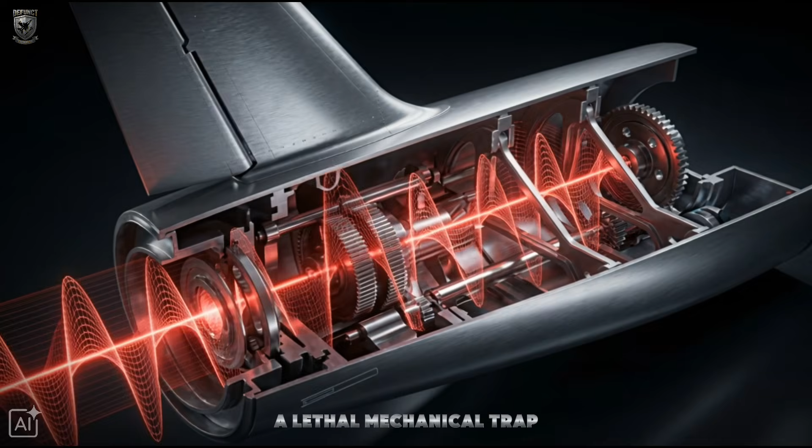The truth, buried deep within declassified engineering failure analyses, is far more terrifying. The Black Hawk was not just defeated by an enemy warhead. It was torn apart from the inside out by an invisible assassin, a lethal mechanical trap known as harmonic resonance, hiding in plain sight at exactly 1,190 revolutions per minute.

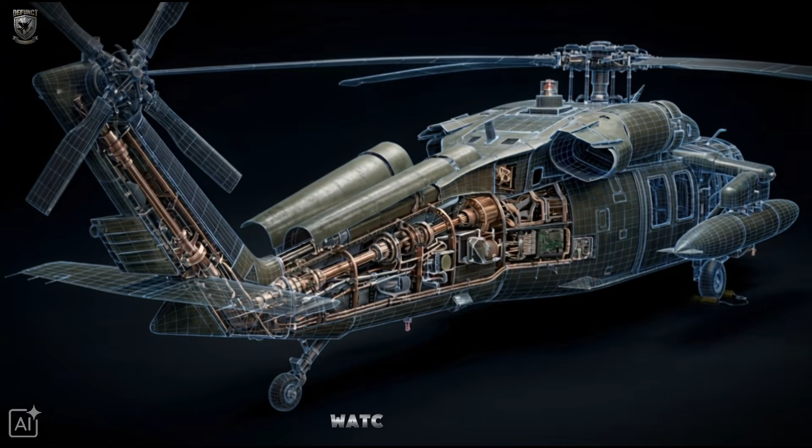Let us strip away the mythology and look at the raw physics. I am going to peel back the 2024 T3 aluminum alloy skin of this tail boom to expose the central nervous system of this $60 million machine. Watch closely as we render the outer shell completely transparent.

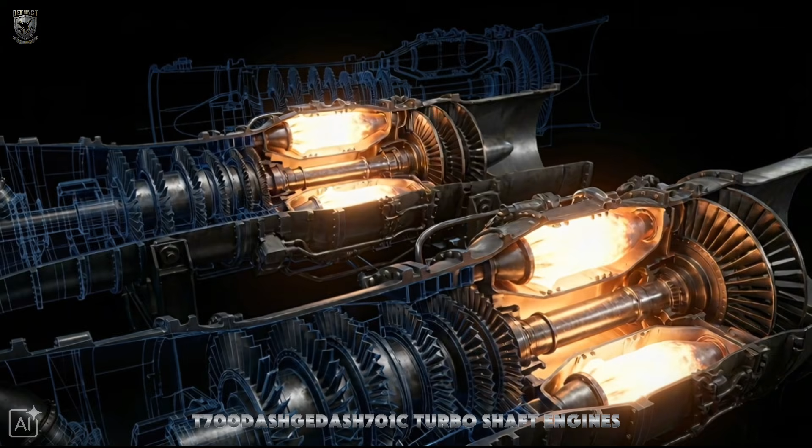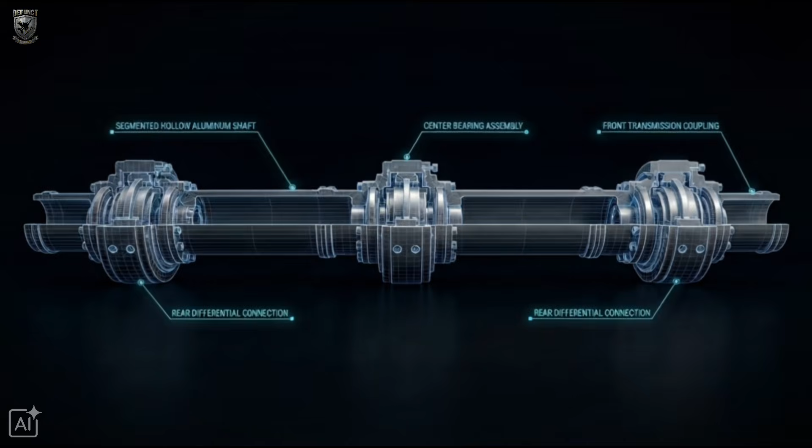What you are looking at is the drivetrain. Up front, twin General Electric T700-GE-701C turboshaft engines generate a combined output of 3,240 shaft horsepower. That immense kinetic energy has to go somewhere.

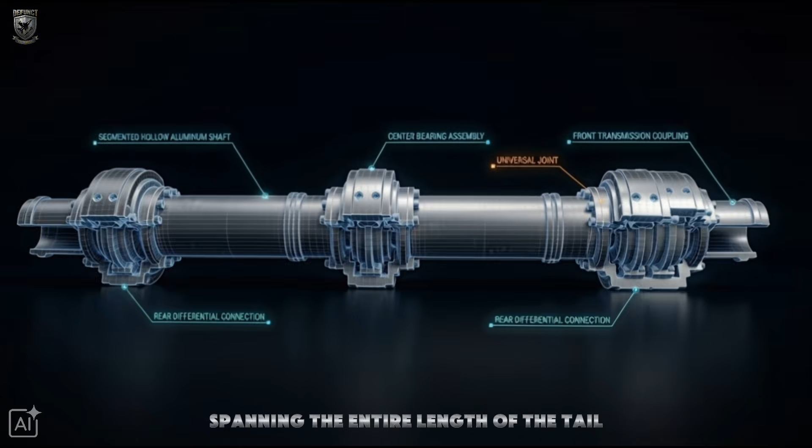A massive portion of it is sent down this spine. We are looking at a segmented driveshaft spanning the entire length of the tail, composed of 6 individual hollow aluminum sections. These sections are coupled together by viscous damper bearings, ultimately feeding rotational force into the tail rotor gearbox.

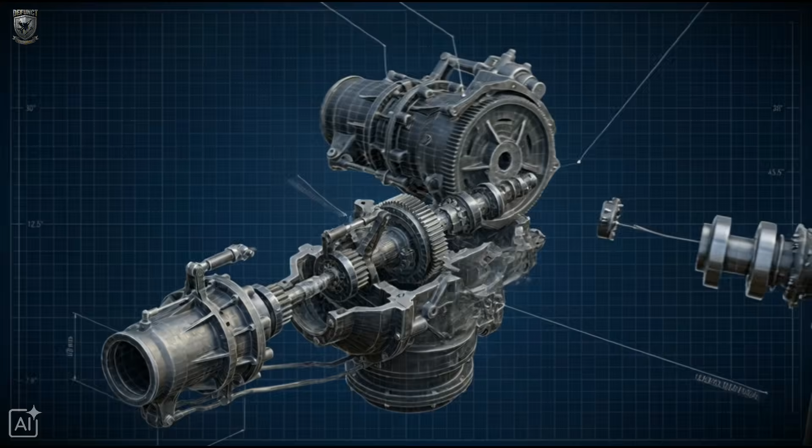Now look at the tail rotor itself. The engineers at Sikorsky built this component to be an absolute fortress. The rotor blades are forged from a Kevlar composite matrix, featuring a titanium leading edge. They over-engineered it specifically to withstand a direct hit from a 23mm anti-aircraft shell. It is a masterpiece of ballistic survivability.

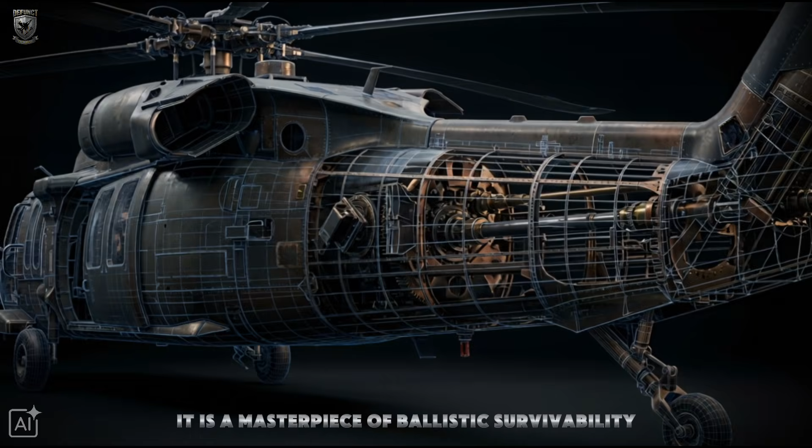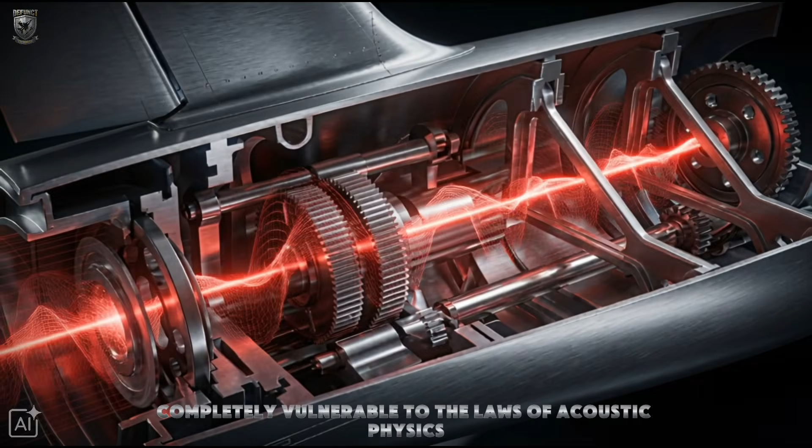But here's the fatal irony. In their pursuit of armor and material strength, they created a system completely vulnerable to the laws of acoustic physics. To understand this flaw, we have to pause the rotor and analyze the baseline frequencies of the airframe.

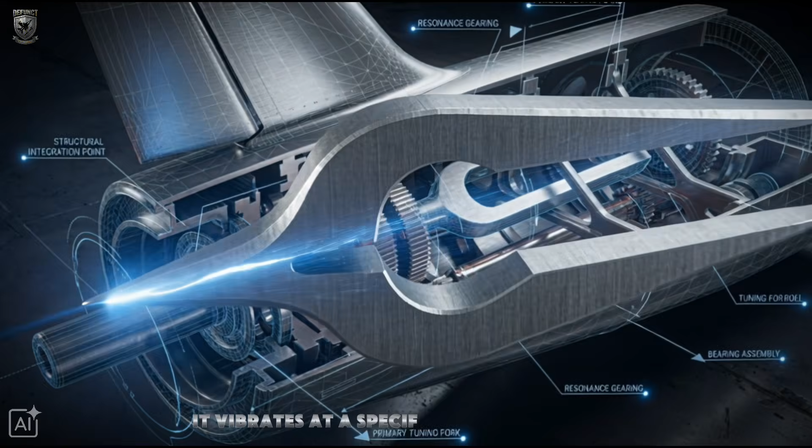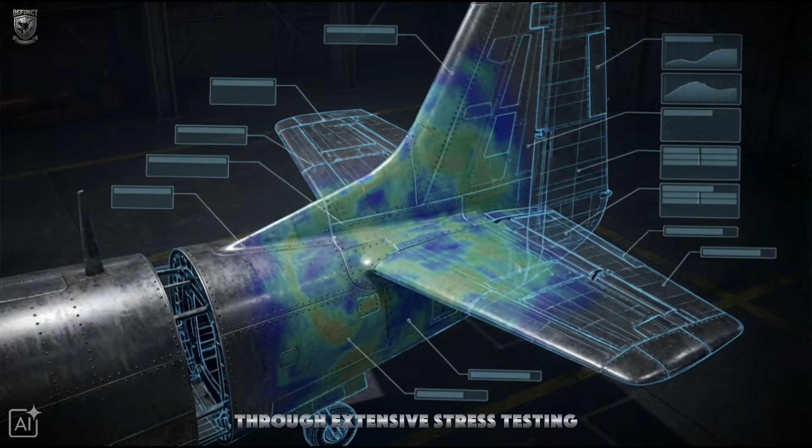Everything in the physical universe has a natural frequency. If you strike a tuning fork, it vibrates at a specific, unchanging rate. The UH-60's tail boom is a massive tuning fork made of aluminum and steel. Through extensive stress testing, engineers knew the natural resonant frequency of this tail section.

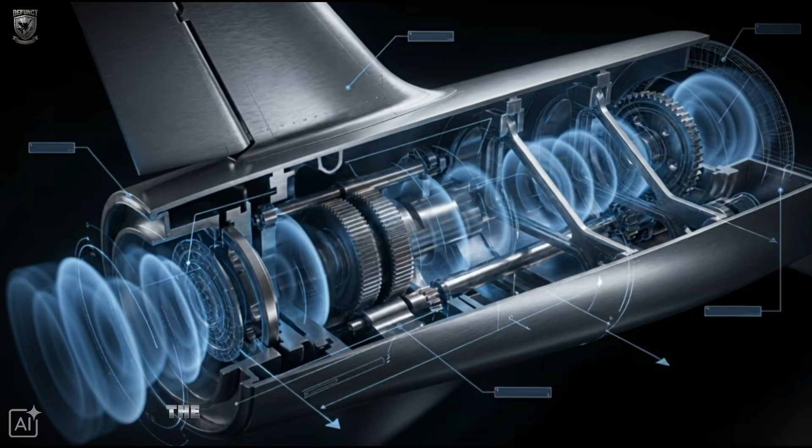Under normal combat conditions, the drivetrain spins at a nominal rate, pushing the tail rotor to hundreds of revolutions per minute, well outside the danger zone. The acoustic waves generated by the spinning shaft pass harmlessly through the metal frame.

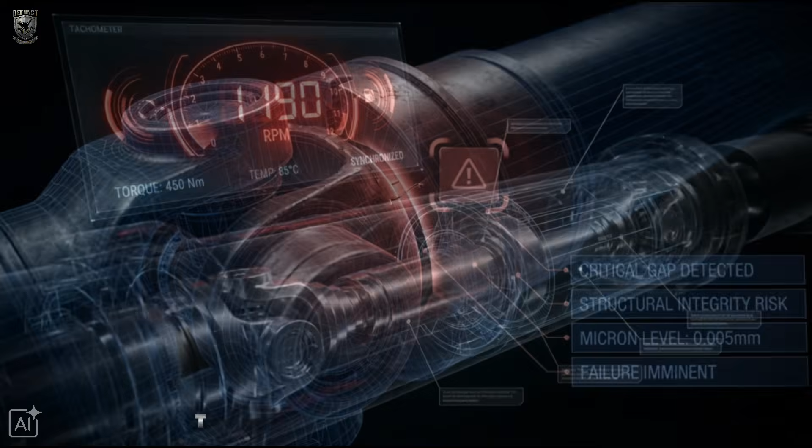But the blueprints reveal a microscopic gap in this perfection. There is a very specific rotational speed, exactly 1,190 revolutions per minute, where the spinning frequency of the driveshaft perfectly matches the natural resonant frequency of the tail boom. If the driveshaft RPM drops and holds at that exact number, the physical vibrations do not cancel out. They synchronize. They stack on top of each other.

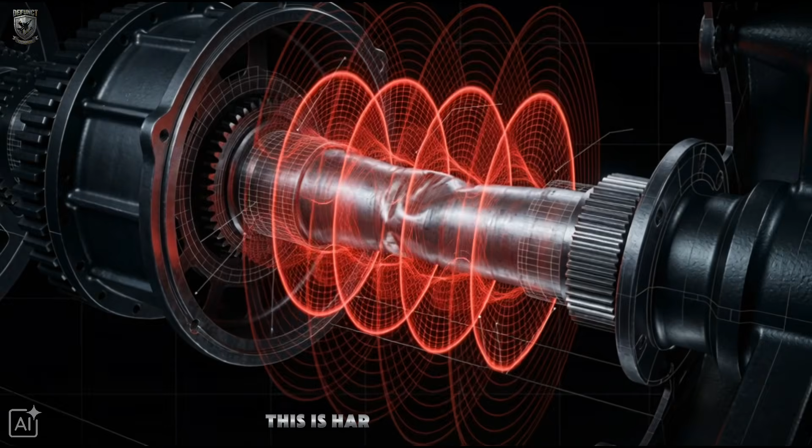This is harmonic resonance. It is the exact same physical principle that allows a trained soprano to shatter a crystal glass with her voice. Except, in this scenario, the glass is a military helicopter carrying highly trained operatives, and the voice is a 3,000 horsepower mechanical scream.

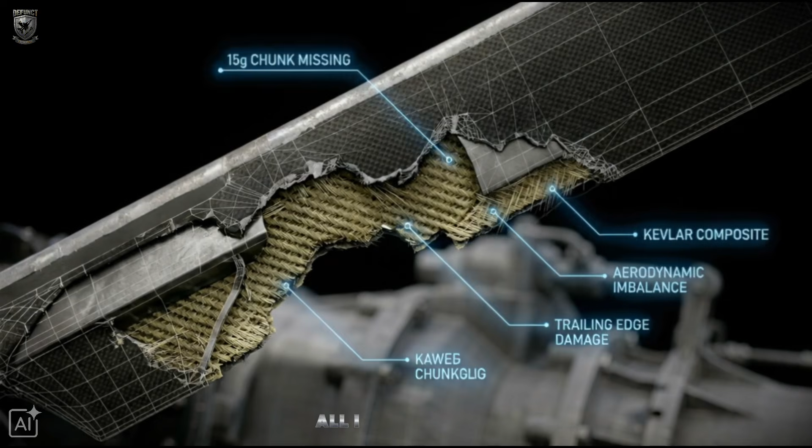The system is fundamentally designed to tear itself apart if it hits that acoustic sweet spot. And in the thin, searing 40°C air of Mogadishu, all it took was 15 grams of missing mass to trigger the countdown. Let us zoom in further on those viscous damper bearings connecting the 6 driveshaft segments.

These are not simple ball bearings. They are filled with a highly specialized silicone fluid, designed to absorb the microscopic tremors generated by the twin turbines.

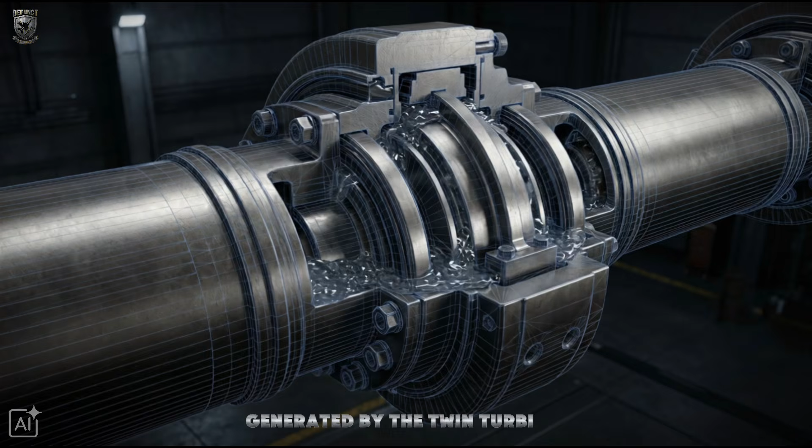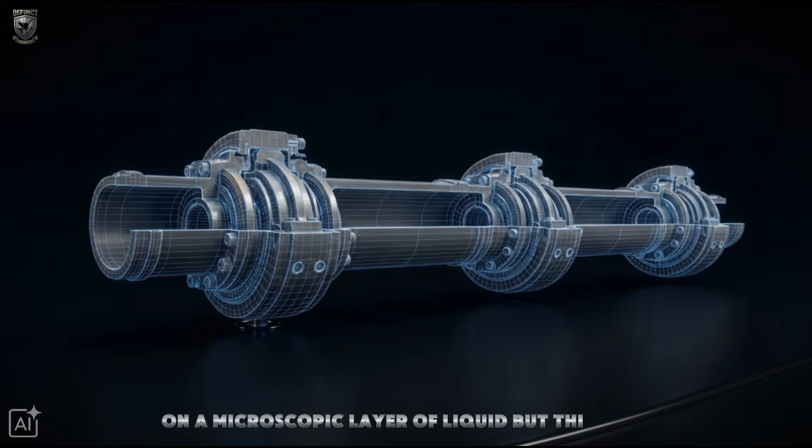We are taking a cross-section of the bearing housing. Notice the tight tolerances, less than 0.003 of an inch of clearance between the spinning shaft and the stationary race. When operating at peak efficiency, the fluid creates a hydrodynamic wedge, literally floating the driveshaft on a microscopic layer of liquid. But this fluid is highly sensitive to thermal overload.

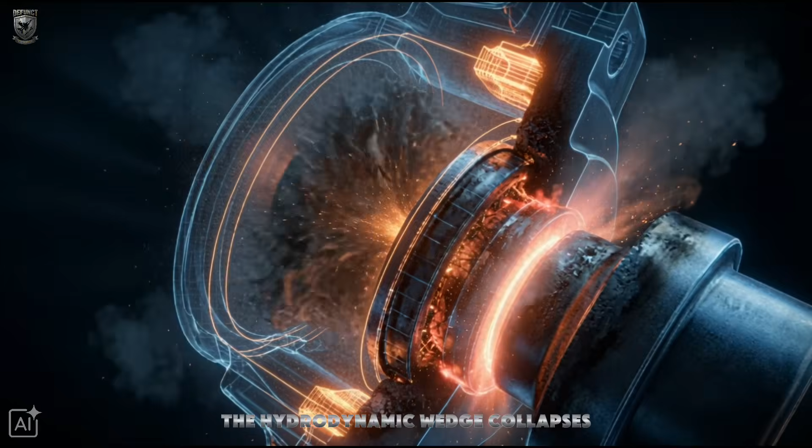If the shaft begins to wobble, the friction spikes. The internal temperature of the bearing housing can skyrocket from an ambient 90 degrees to over 400 degrees Fahrenheit in a matter of seconds. The silicone fluid breaks down, losing its viscosity. The hydrodynamic wedge collapses. Metal begins to grind directly against metal. Now, look back at the tail rotor blades.

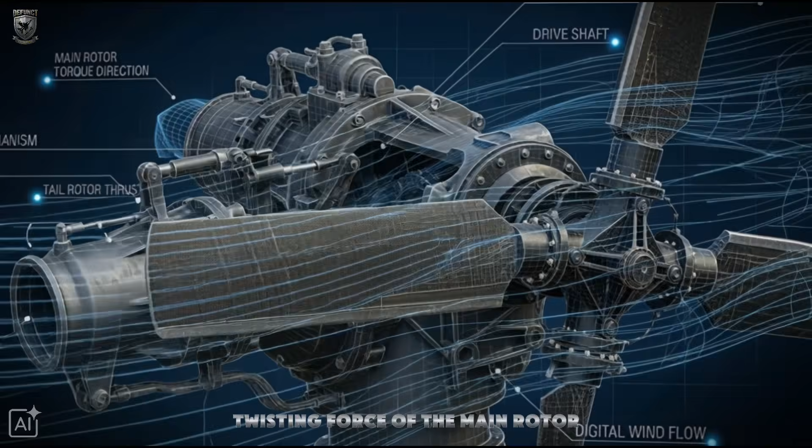They span 9 feet in diameter, acting as a massive gyroscope at the rear of the aircraft. They are pitched at precisely calculated angles to generate anti-torque, counteracting the immense twisting force of the main rotor. Every single ounce of weight on those blades is balanced dynamically. If you add or remove even a fraction of an ounce, you introduce a mass imbalance.

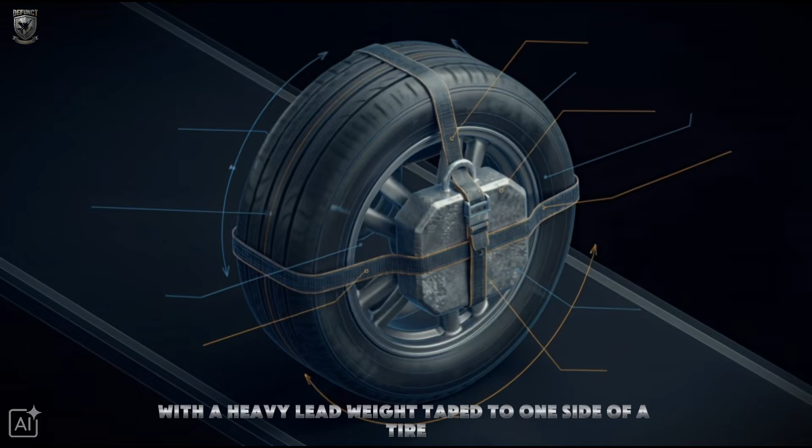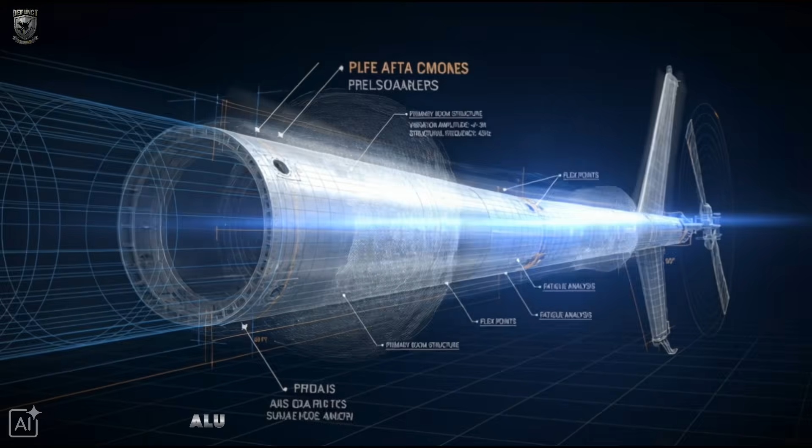Imagine taking your car down the highway with a heavy lead weight taped to one side of a tire. The steering wheel shakes violently. Now multiply that rotational speed by 10, and imagine that tire is attached to a hollow aluminum tube suspended 50 feet in the air. That is the kinetic reality of a compromised tail rotor.

The Sikorsky design team knew about the dangers of vibration. They installed elaborate elastomeric bearings in the main rotor hub. These are essentially high-tech rubber shock absorbers, incredibly efficient at soaking up the brutal, low-frequency thumping of the massive main blades cutting through the air.

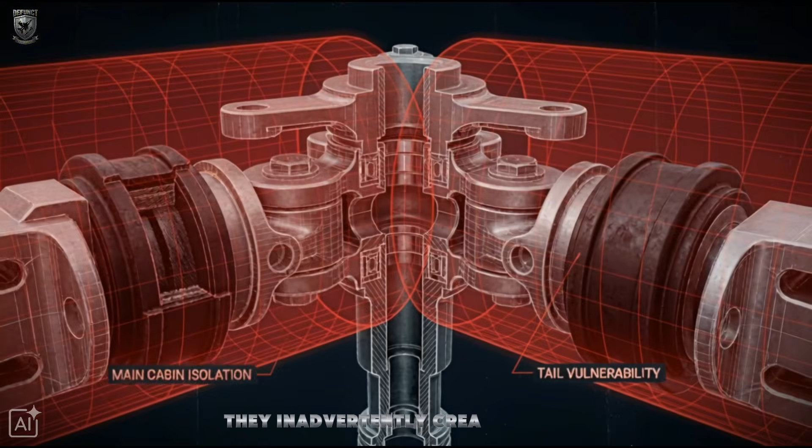However, by isolating the main cabin so effectively, they inadvertently created a trap. The kinetic energy, the raw, unfiltered vibration from a damaged tail rotor, has nowhere to go. It cannot travel forward into the heavily damped main cabin. So it reflects backwards. It bounces off the elastomeric barrier and is forced straight back down the tail boom. The tail section becomes a rigid lever, amplifying the destructive force.

Every single rivet holding the aluminum skin together is subjected to extreme shear stress. The 2024 T3 aluminum alloy is fantastic for its strength-to-weight ratio, but it is notoriously susceptible to high cycle fatigue. When you subject it to a constant, high-frequency, high-amplitude vibration, microscopic fractures begin to form at the crystalline level of the metal.

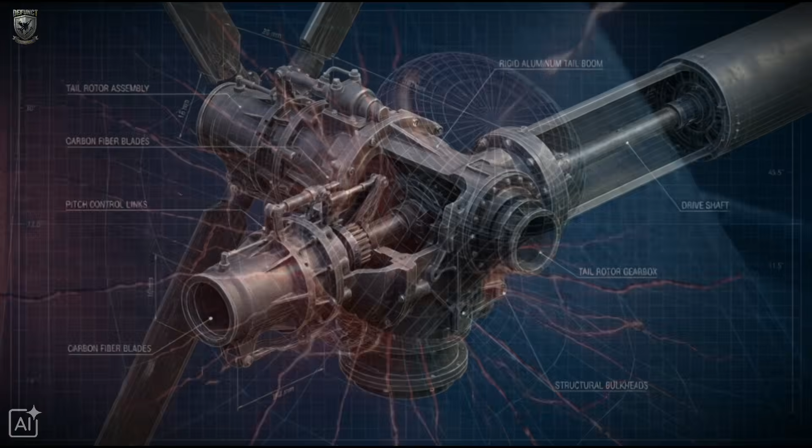We are looking at a simulation of these microfractures spreading across a rivet hole, expanding at a rate of millimeters per second. This is the anatomical layout of the hidden trap. A Kevlar-reinforced tail rotor, completely capable of surviving a localized explosion, bolted to a driveshaft system that will obliterate itself if forced into the 1,190 revolutions per minute death zone.

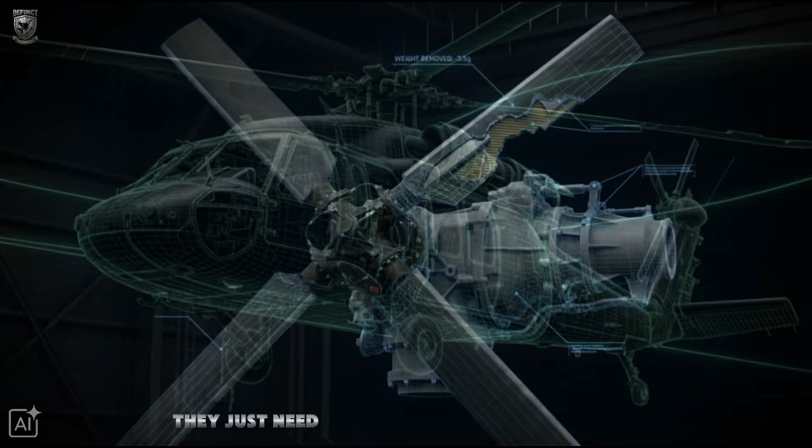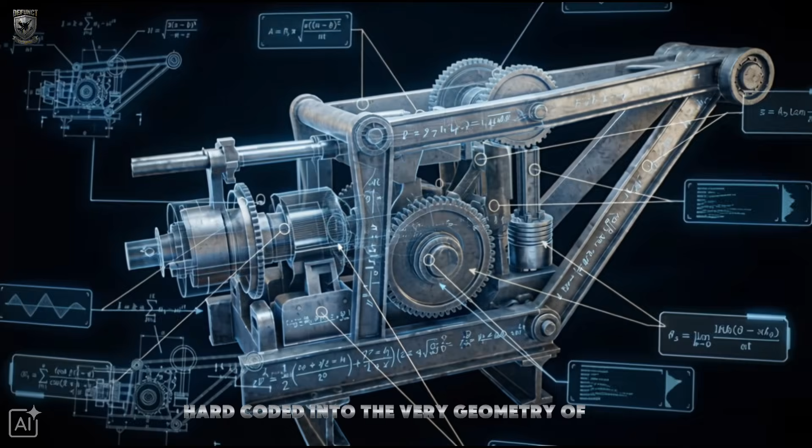All the enemy needed to do was scratch the surface. They did not need to blow the helicopter out of the sky. They just needed to alter its physical weight by a few grams, force the engines to bleed off speed, and let the unforgiving laws of acoustic physics finish the job. This is not just a vulnerability. It is a mathematical certainty, hard-coded into the very geometry of the airframe.

Let us place this meticulously designed machine into the unforgiving crucible of urban combat. The airspace above Mogadishu is saturated with hostile fire. The trajectory of a Soviet-manufactured RPG-7 warhead intersects with the rotational arc of the Black Hawk's tail section.

However, the initial kinetic impact does not trigger a catastrophic high-explosive detonation. The ballistic tolerance of the Kevlar composite matrix actually performs exactly as Sikorsky engineers intended, absorbing the blunt force trauma and preventing the blade from instantly shattering.

But the kinetic energy transfer shears off a jagged, seemingly insignificant chunk of the blade's trailing edge. We are talking about a microscopic loss of mass. Precisely 15 grams of composite material vanishing from an aerodynamic surface that is currently spinning at 1,400 revolutions per minute.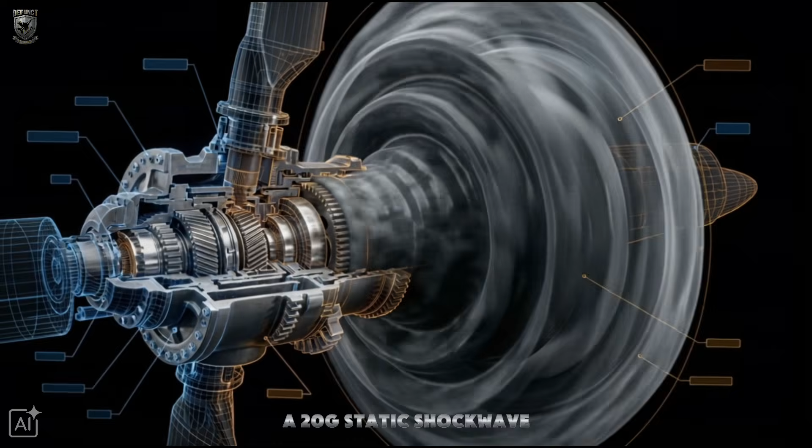Instantly, the flawless gyroscopic balance of the tail assembly is violently compromised. The tail rotor ceases to be a precision, stabilizing instrument and instantly transforms into a massive, unbalanced wrecking ball attached to the rear of the aircraft. A 20G static shockwave, a burst of pure kinetic displacement, rips through the cast magnesium housing of the tail rotor gearbox. Inside the cockpit, the pilots are fighting a sudden, violent yaw.

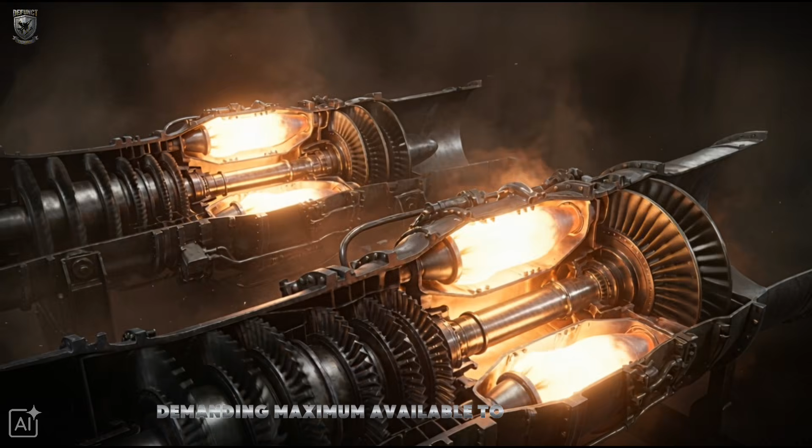To maintain altitude and directional control, they instinctively and aggressively manipulate the collective pitch lever, demanding maximum available torque from the twin T700 turboshaft engines. This sudden, extreme power demand causes a momentary, yet physically fatal, bleed-off in overall rotor speed. Watch the digital tachometer telemetry stream drop in real time, from the nominal 1,350 revolutions per minute down to 1,280.

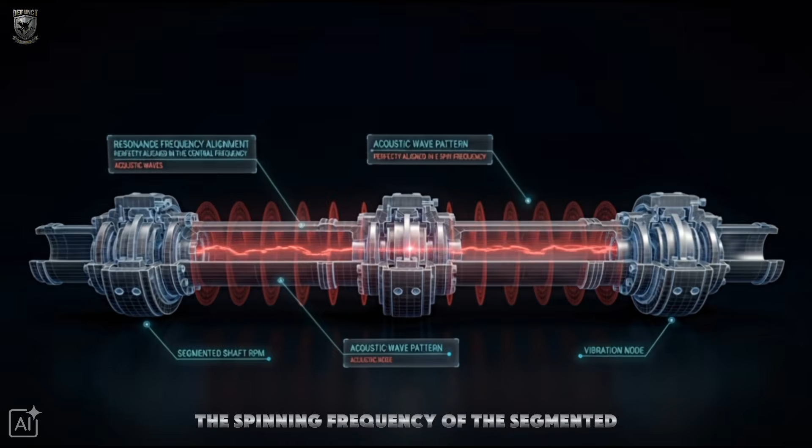And then it hits the acoustic death zone, 1,190 revolutions per minute. This is the exact millisecond the spinning frequency of the segmented aluminum driveshaft mathematically synchronizes with the natural resonant frequency of the entire aluminum and steel tail boom structure.

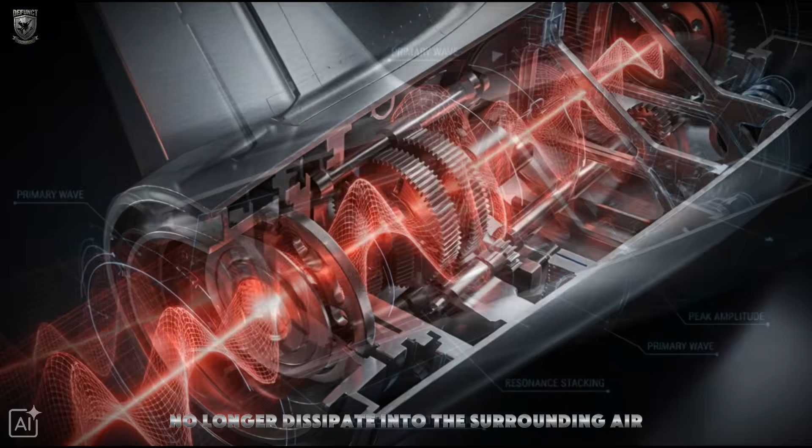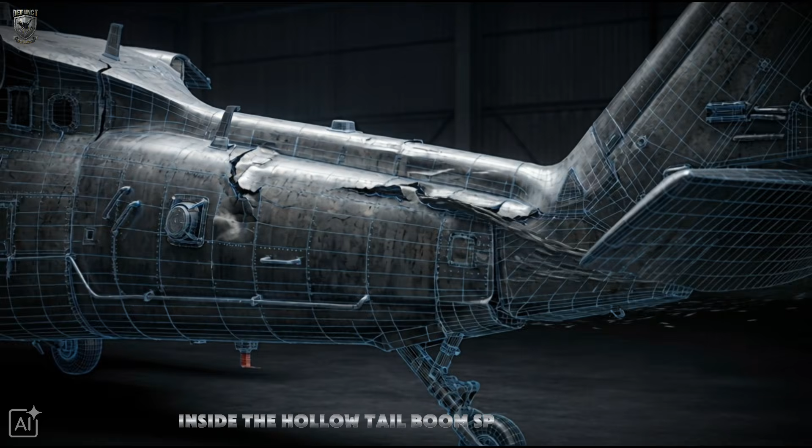The physical vibrations traveling down the spine of the aircraft no longer dissipate into the surrounding air. They synchronize, they stack, they multiply exponentially through the principle of harmonic resonance. The amplitude of the oscillation inside the hollow tail boom spikes brutally. What was once a safely engineered half-inch operational deviation instantly magnifies into a structural tearing 4 inches of lateral movement.

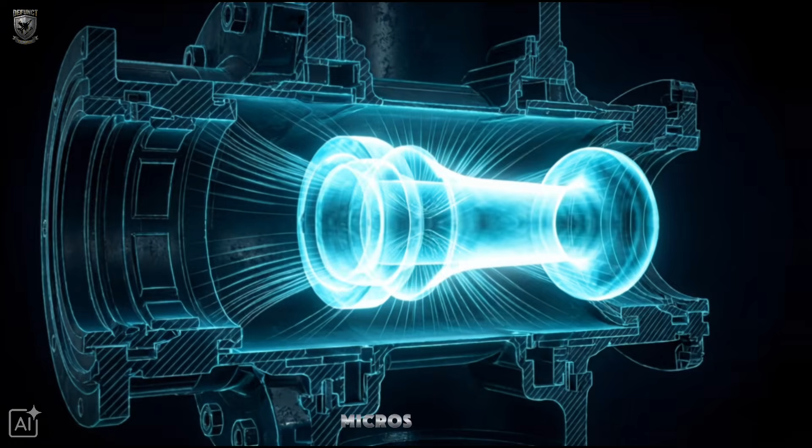We are now switching the visual feed to an internal, microscopic X-ray view of the primary titanium pitch horn. This critical component is directly responsible for altering the angle of attack of the tail blades. Under the grip of synchronized harmonic resonance, this titanium forging is subjected to an unbearable high-cycle fatigue load.

The tensile strength of aerospace-grade titanium is legendary, but right now it is being pushed far past its ultimate yield point by acoustic geometry. In real time, you can see the microscopic crystalline structure of the metal physically separating. The high-frequency vibration is generating intense localized friction, superheating the titanium at the fracture point.

It takes exactly 14 seconds from the moment of synchronization for the structural integrity to completely fail. Let us track the failure cascade back up the tail.

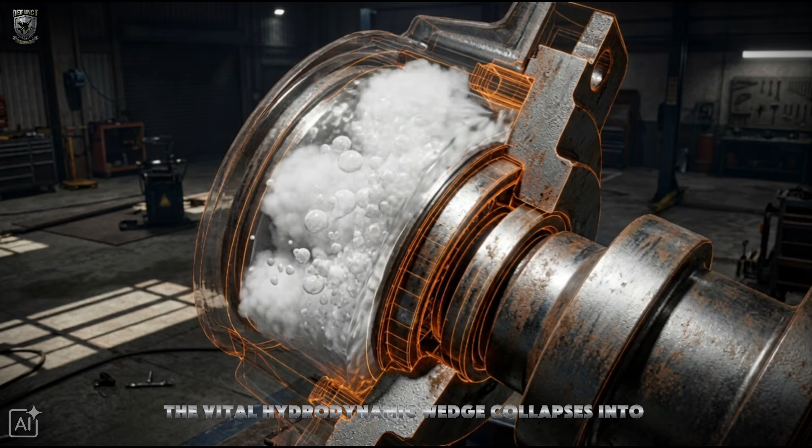The silicone dampening fluid inside the viscous bearings, which we examined earlier, literally boils off. The vital hydrodynamic wedge collapses into vapor. Deprived of all lubrication and vibrating violently at the exact resonant frequency of its housing, the number 4 driveshaft segment succumbs to its own centrifugal force.

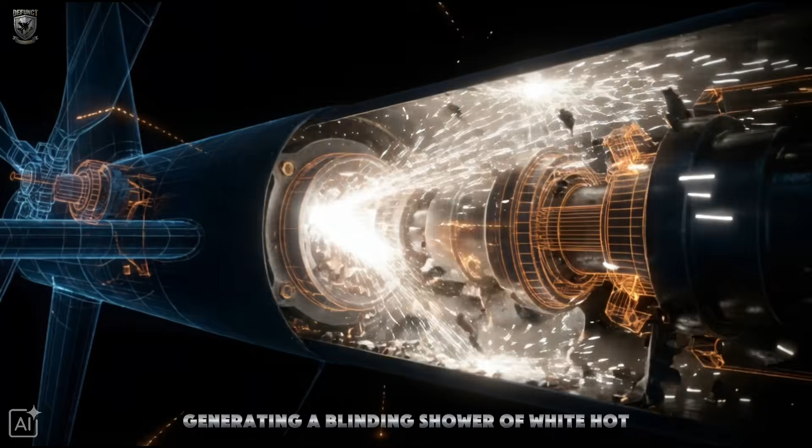It bows outward, scraping aggressively against the inner wall of the tail boom, generating a blinding shower of white-hot titanium and aluminum sparks. The immense twisting torque of the engines meets the acoustic resistance of the frame, and the driveshaft violently snaps into 3 jagged, distinct pieces. The mechanical link between the turboshaft engines and the anti-torque tail rotor is now completely and permanently severed.

As the tail mechanism fails, the airframe instantly loses all anti-torque stabilization. The massive rotational inertia of the main rotor immediately transfers a counter-rotational force to the fuselage. The Black Hawk enters a violent, uncontrolled flat spin, rotating at over 120 degrees per second. The centrifugal force inside the cabin pins the operators to the bulkheads, exposing them to sustained multi-G physical trauma.

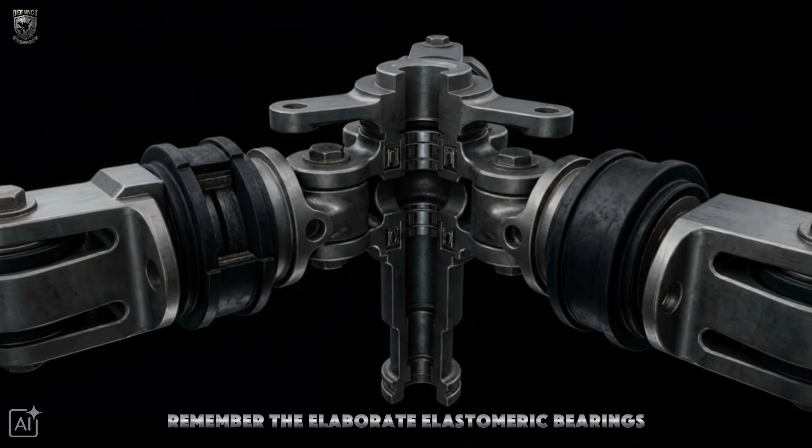But the internal mechanical destruction is still not over. Remember the elaborate elastomeric bearings located in the main rotor hub? Those high-tech rubber shock absorbers designed to protect the crew? They continue to perform their job flawlessly, preventing the violent, tearing vibrations from entering the main cabin.

But by acting as an impenetrable acoustic wall, they inadvertently force every single ounce of that chaotic, rebounding kinetic energy straight back down into the compromised tail section. The tail boom becomes a rigid lever, amplifying the destructive force with every rotation of the main blades.

The 2024 T3 aluminum skin buckles under the immense shear stress. The acoustic pressure waves decapitate the structural aircraft rivets, popping them out of their sockets like high-velocity shotgun pellets. The entire tail section, fighting a losing battle against the massive anti-torque twisting force of the main rotor and its own internal, amplified acoustic resonance, simply folds in on itself.

The structural spars snap, and the tail detaches completely from the fuselage, sending the $6 million machine into an unrecoverable kinetic impact with the desert floor.

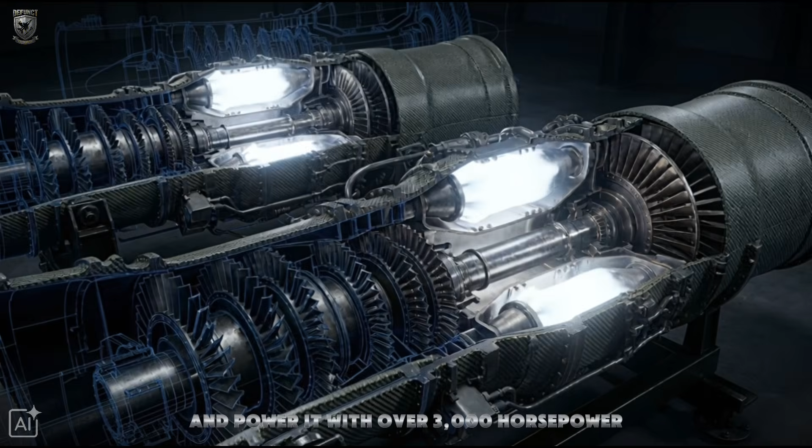This is the brutal, unforgiving reality of aerospace engineering. You can build a machine capable of surviving direct 23mm anti-aircraft fire. You can wrap it in state-of-the-art Kevlar composite armor and power it with over 3,000 horsepower. But you cannot armor a helicopter against the fundamental, invisible laws of acoustic physics.

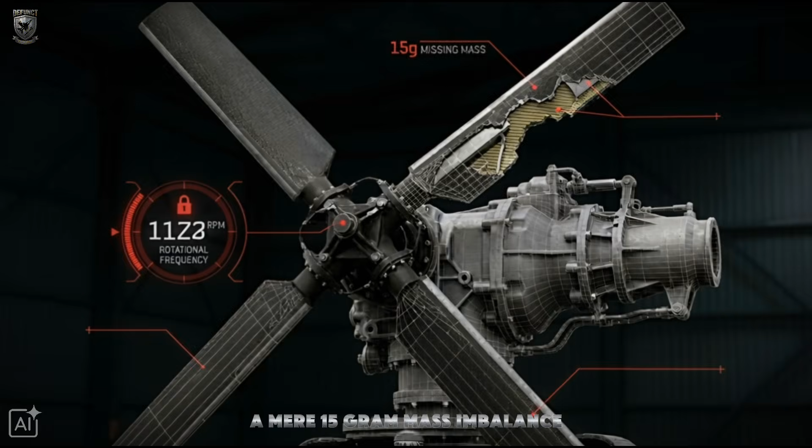A mere 15-gram mass imbalance, combined with a highly specific rotational frequency, turned the Black Hawk's own immense kinetic energy into the exact weapon that brought it down.

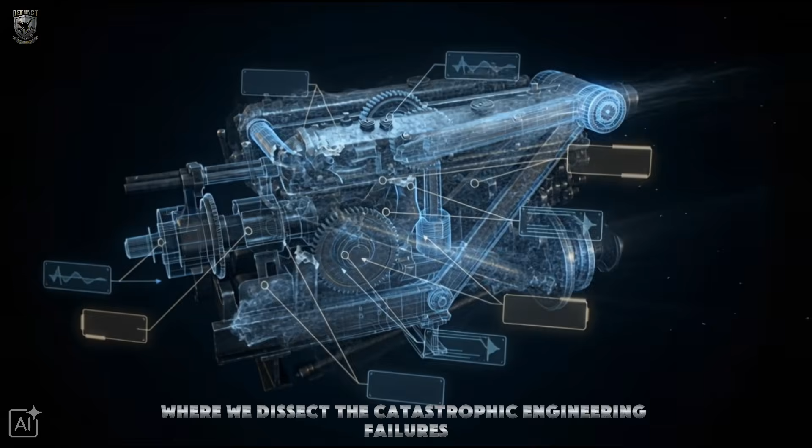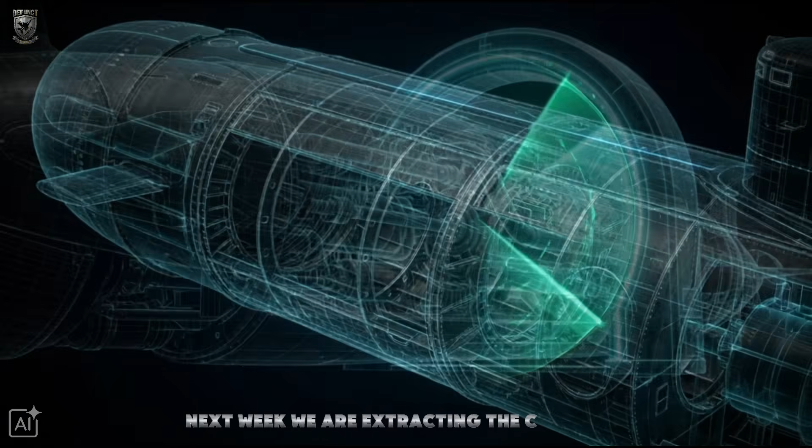We are extracting the classified Cold War telemetry data from a Soviet-era nuclear attack submarine to expose a microscopic pressure hull design flaw. A flaw that turned a routine deep dive structural test into a highly classified instant kinetic implosion. See you in the next analysis.